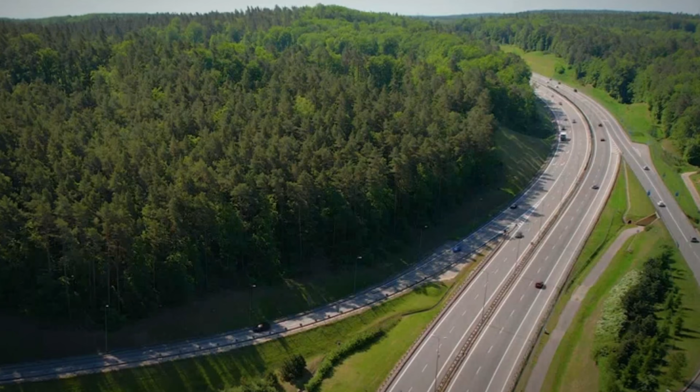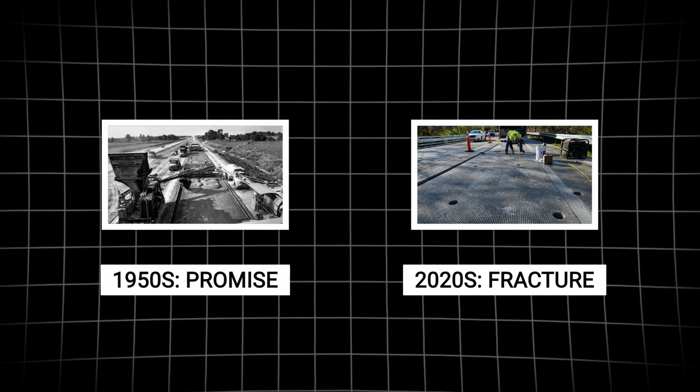You have driven it 1,000 times without a single thought—the overpass that has always been there, the gray ribbon that was old when your parents were young, and will be there, you assume, long after you're gone. Concrete feels like the closest thing we build to forever.

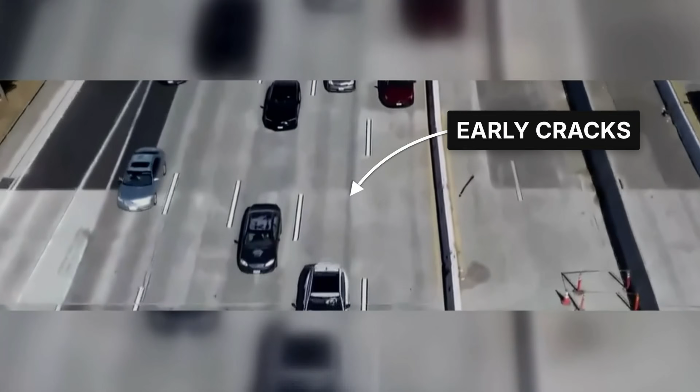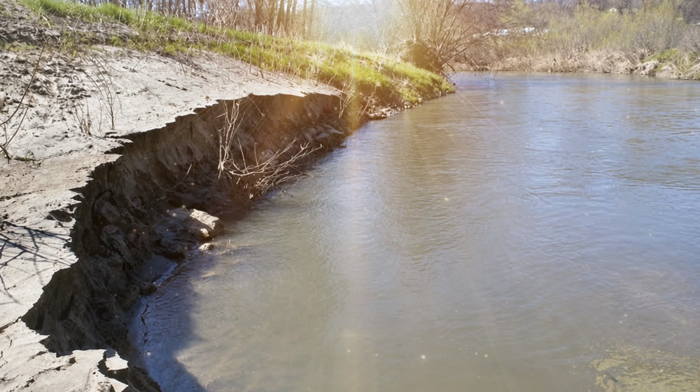That is the trick, because the road under your tires was never meant to last, and the new one already knows it. Here is the strange thing about a road: it is the one piece of the modern world we treat as permanent scenery. We name our exits, memorize our merges, and file the whole surface away under things that do not change. A mountain erodes, a river moves, but the highway, we decide, simply is.

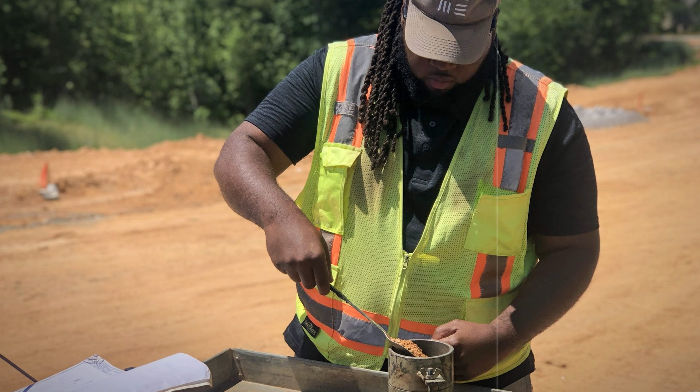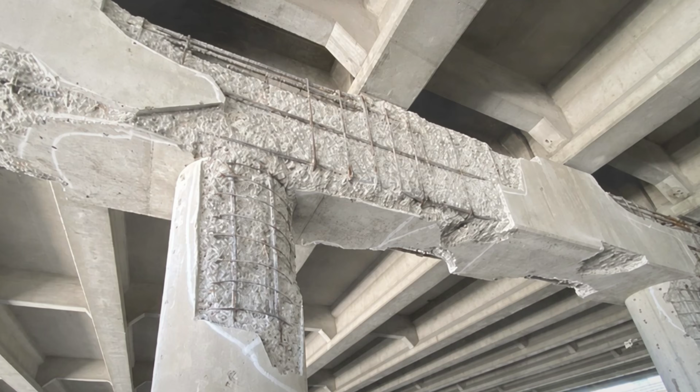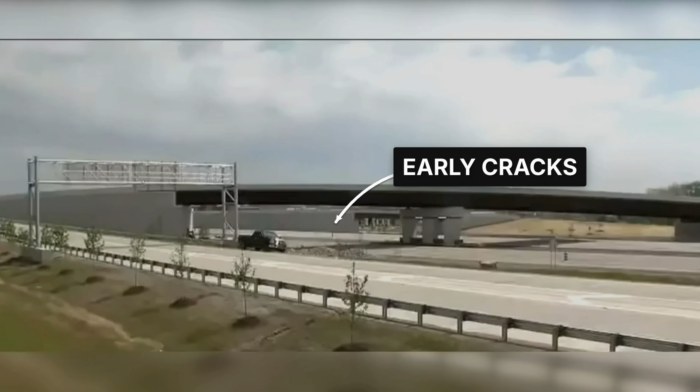It was poured before we got here, and it will be poured over long after we leave. That belief is exactly what this story is about—not the road you can see, but the promise buried under it. Because America was sold a highway meant to outlast everyone who would ever drive on it, and the country agreed, quietly, to stop asking how long that would actually be. The answer is not comforting, and the newest, most advanced version of that promise, the one engineers now brag can hold up for a century, is already breaking in places where the concrete has not even finished curing.

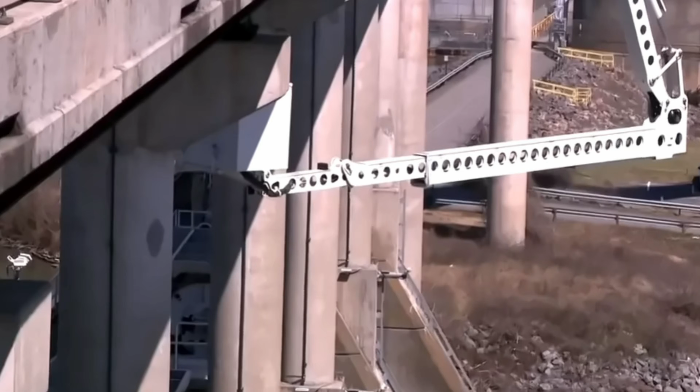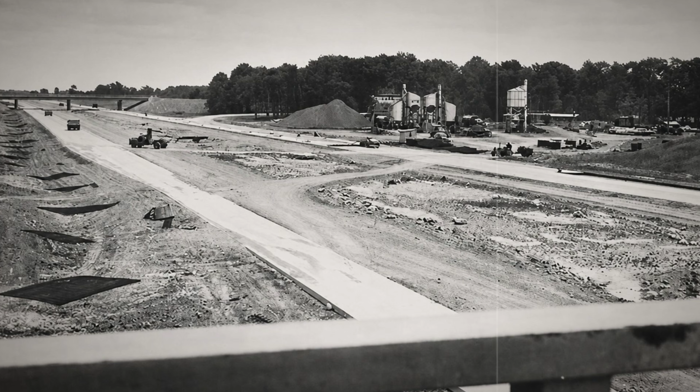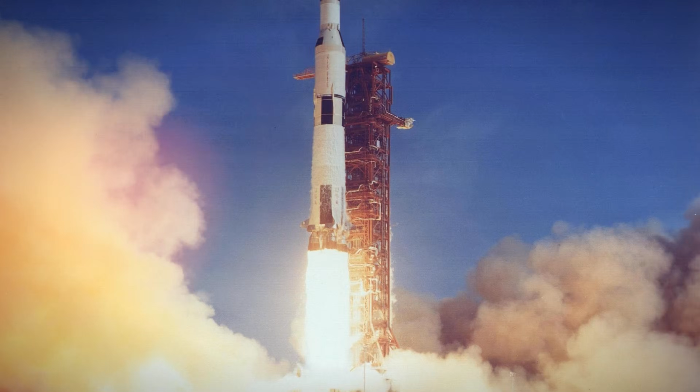Let's get into it. Start with the promise, because it was enormous. On June 29, 1956, President Dwight Eisenhower signed the Federal Aid Highway Act, and with one signature launched what would become roughly 47,000 miles of interstate, a network that eventually cost on the order of $130 billion and rewired the entire country. It was pitched the way we pitch moonshots, the largest public works project in human history, a concrete tapestry stitching every American place to every other. A man could now drive coast to coast without a single traffic light.

It felt like building something that would stand for 1,000 years. But permanence was never in the fine print. It was never in the fine print at all. When engineers actually designed those roads, they built them to a 20-year design life. 20 years. The gleaming symbol of American permanence was, on paper, a 2-decade product.

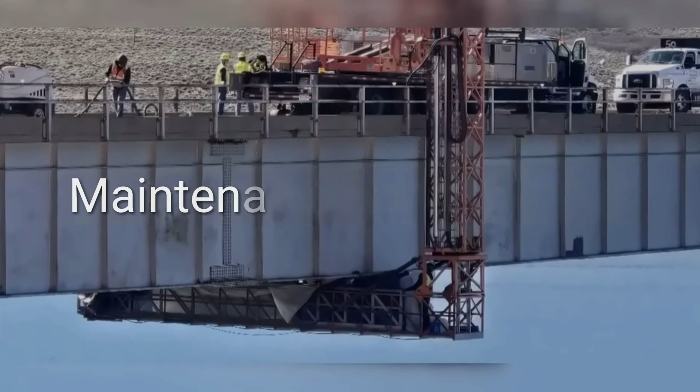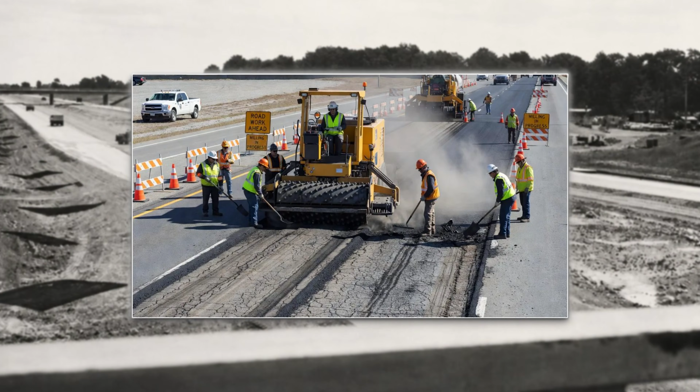And the reason it didn't collapse on schedule is the first quiet truth of this whole story: nobody intended for it to be temporary out loud. They simply assumed the future would keep paying to rebuild it. The 1956 law that funded the greatest road system on Earth included almost nothing for maintaining it. As one highway historian put it, Congress behaved like a family that builds a beautiful new house and never sets aside a dime for the day the roof goes bad.

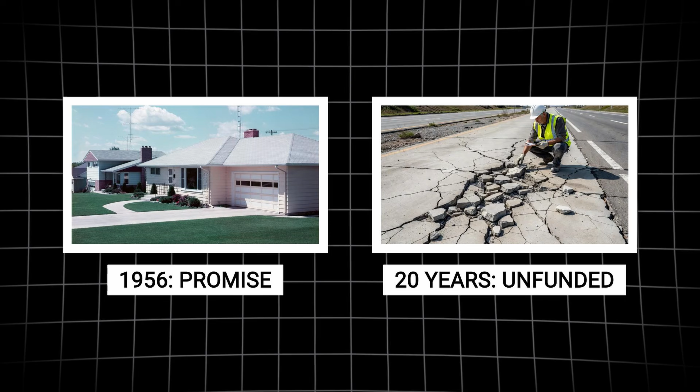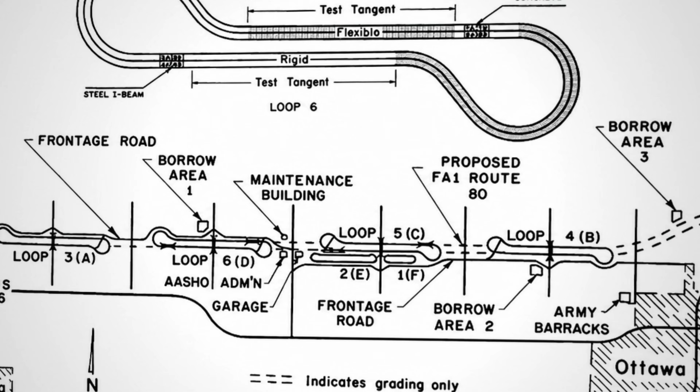The roof went bad faster than anyone guessed. The interstates were carrying more cars and far heavier trucks than the planners had ever modeled. Segments that were supposed to absorb 20 years of wear absorbed it in a fraction of that time. And here is the part almost no driver knows, the reason a single truck matters so much more than your car does. Back in the late 1950s, near Ottawa, Illinois, the highwaymen ran an experiment that would define road building for the next half-century.

They drove army trucks in endless loops over test pavement, millions of miles of it, around the clock, just to watch roads die. What they found became known as the fourth power law, and it is brutal. Double the weight on an axle and you don't do twice the damage, you do 16 times the damage. Follow that curve out and a single loaded 18-wheeler grinds a road the way thousands of cars would.

By one federal estimate, close to 10,000 of them. Every commute, you share the pavement with vehicles that are, structurally speaking, erasing the road beneath you. You are driving on the light end of a machine built for the heavy end.

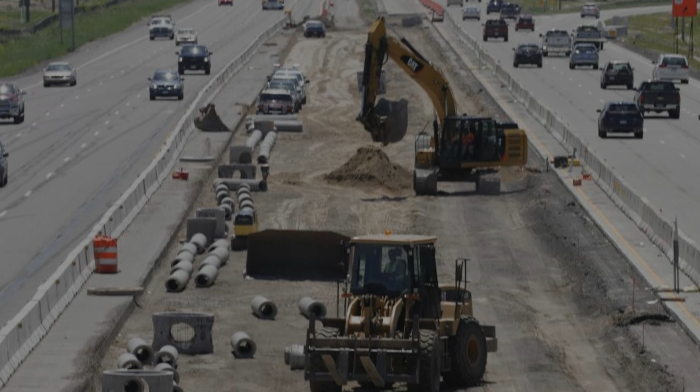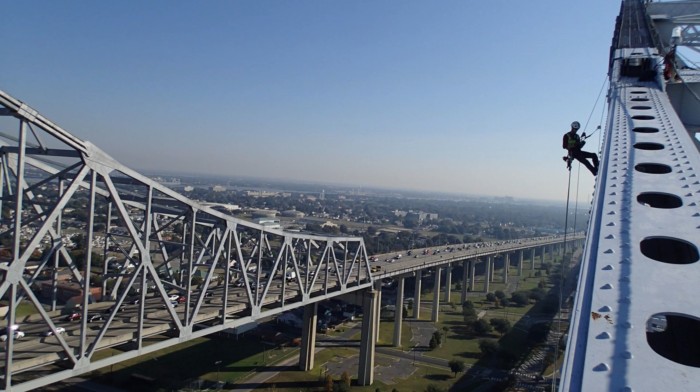So the interstate aged, and America did what it always does with the thing it refuses to see. It patched, it resurfaced, it stretched a 20-year road toward 50, 60, 70 years, and called that success. Today, more than a third of the interstate system is over 50 years old. A third of its bridges need repair or replacement. And the country's civil engineers, the people who actually know, grade America's roads a D+. That is the good news, by the way—it is an improvement over the D they gave a few years back.

Which brings us to the fix, because the modern answer to a crumbling 20-year road is a beautiful phrase the pavement industry now sells with real conviction.

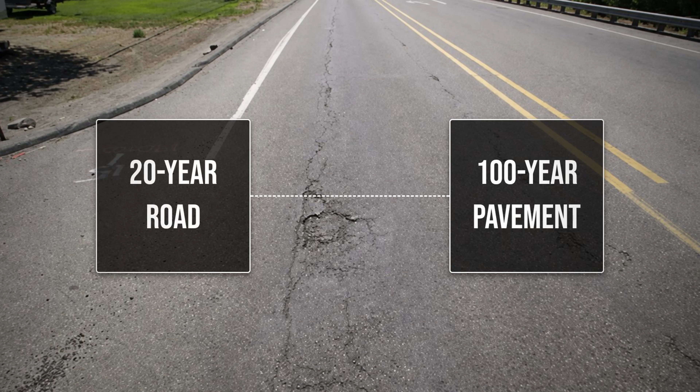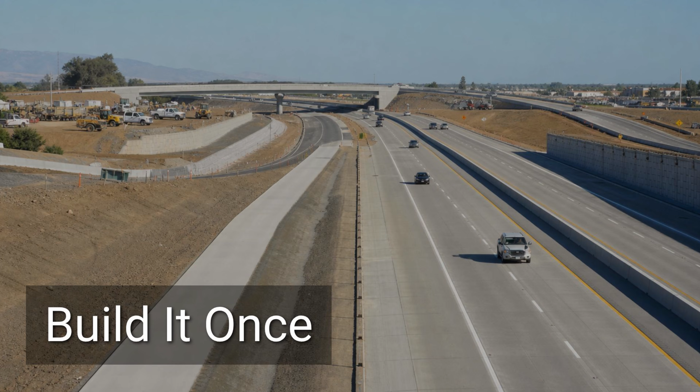100-year pavement, thicker beds, better drainage, engineered layers, the whole science of longevity. Roads designed not to last a generation, but to last a century, to finally break the cycle of tearing everything up every couple of decades. It is the promise in the title. Build it once, build it to outlive us all.

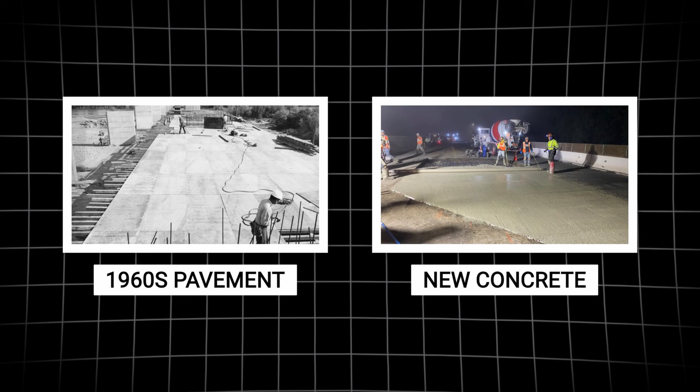And then you look at what actually happens when they pour it. Go to downtown Sacramento, to a stretch of Highway 50 that the state spent about $511 million to rebuild, a project explicitly meant to replace tired 1960s pavement and carry the city for decades to come. New concrete went down in the summer of 2023. Within roughly a year, inspectors found it cracking, chunks breaking loose.

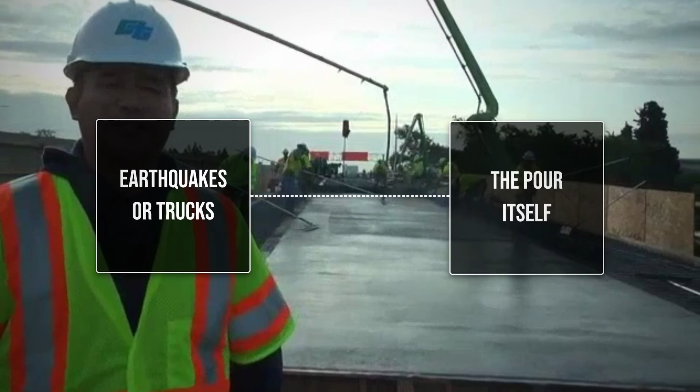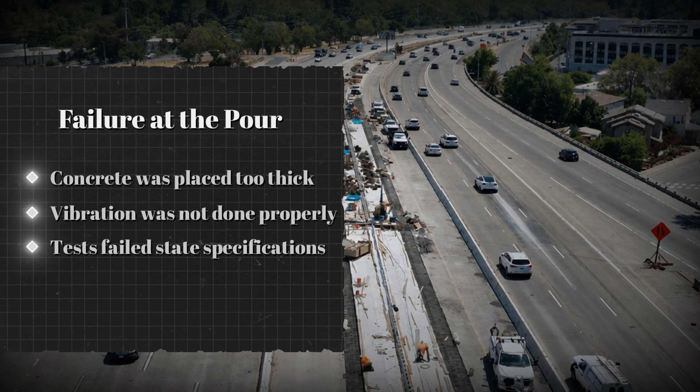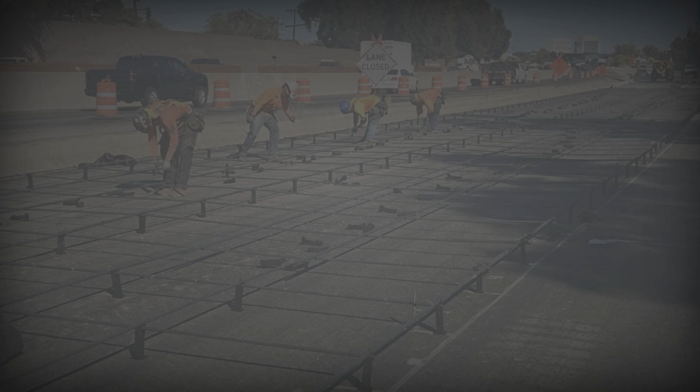Not from earthquakes, not from decades of trucks, from the pour itself. The concrete had been laid too thick and hadn't been properly vibrated as it set, and testing showed it simply didn't meet the state's own specifications. A 280-foot section, about the length of 3 basketball courts laid end to end, had to be torn out and poured again. The brand new road, the one built to last, failed before it was old enough to have a pothole. The contractor ate the cost, and officials were quick to call it rare.

But that is precisely the point. The promise is a century. The reality can be months. And even when they get the pour right, the world is working against it every single day.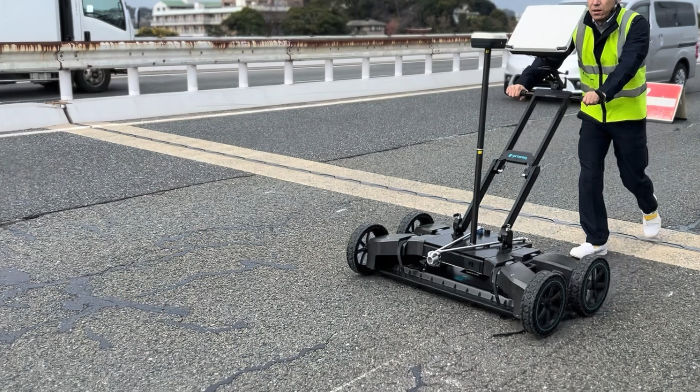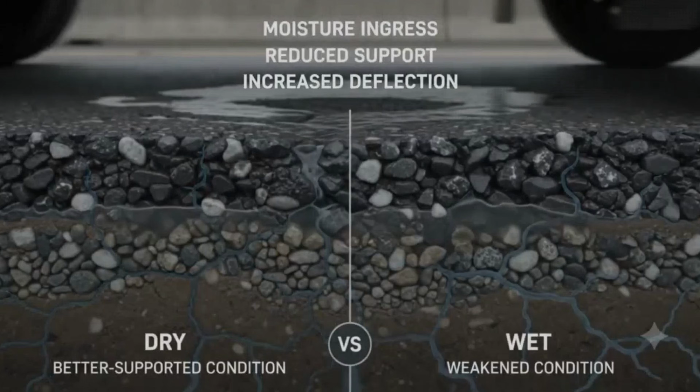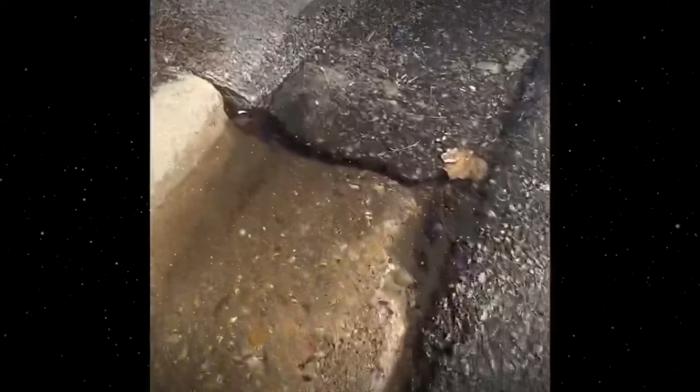This is the second quiet truth. A road is not a solid thing sitting on the ground. It is a thin skin stretched over dirt, and everything wants underneath it. Water finds the smallest crack and seeps below the surface. In winter it freezes, expands, and pries the layers apart. Then a heavy truck rolls over that hidden pocket of water and slams it downward like a hammer, blowing out the base from below. Do that 10,000 times a day and you get the pothole that swallowed your alignment last spring.

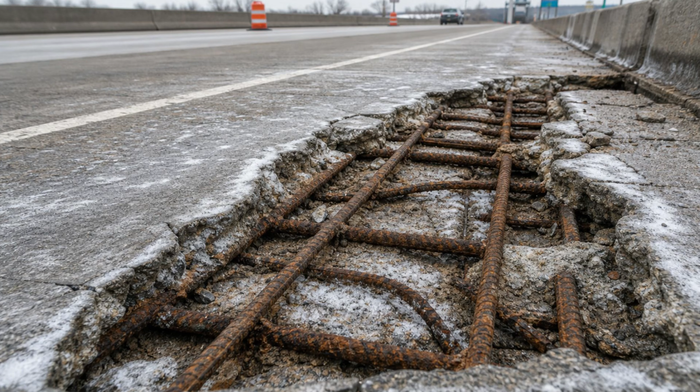Add the salt we pour on roads to melt ice, which quietly eats concrete and corrodes the steel inside it. Add the coastal air. The road is losing a slow war with physics that begins the moment it's finished.

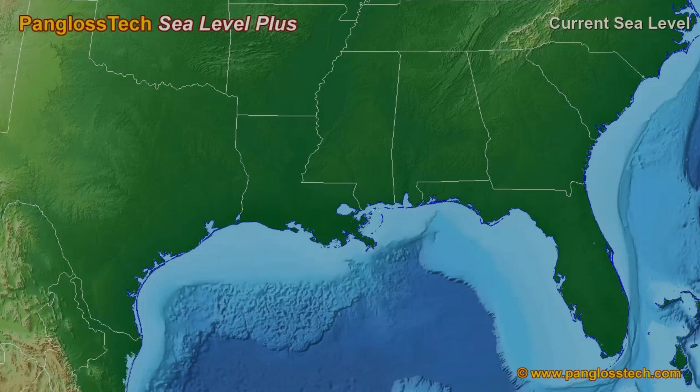Now widen the lens, because the ground itself is changing under the whole system. More than 60,000 miles of America's coastal roads already sit in the path of rising water. Along the Gulf Coast alone, federal researchers estimate that some 2,400 miles of major roadway could be permanently underwater within the next 50 to 100 years. That is the cruel irony folded into a 100-year promise. You can engineer pavement to last a century, and the coastline it runs along may not be there to hold it.

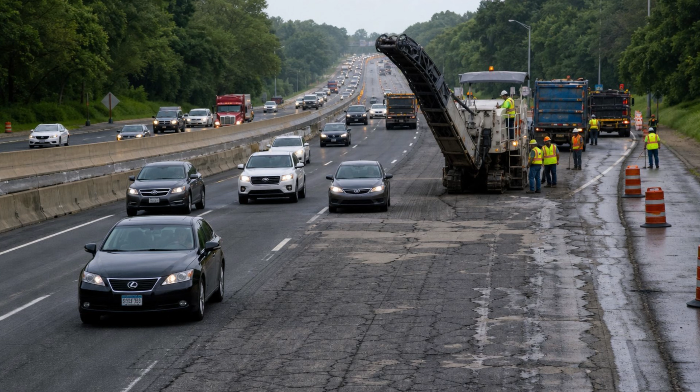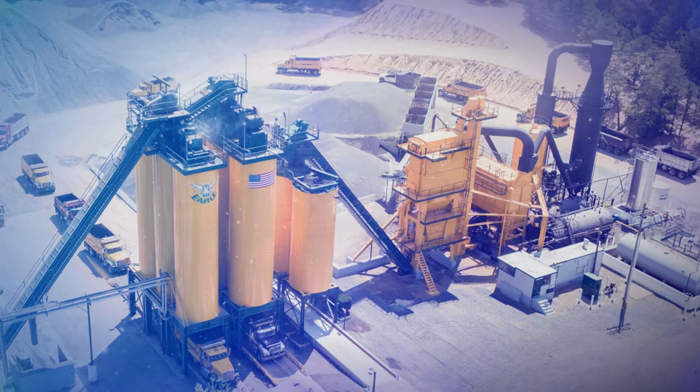So why don't we just fix all of it? Here is the money truth, and it is almost funny if you don't think about it too hard. The main way America pays to build and repair its roads is the federal gas tax, 18.4 cents a gallon. That number was set in 1993 and has not moved since. Not for inflation, not for anything. A generation of rising costs and more efficient engines has quietly gutted it.

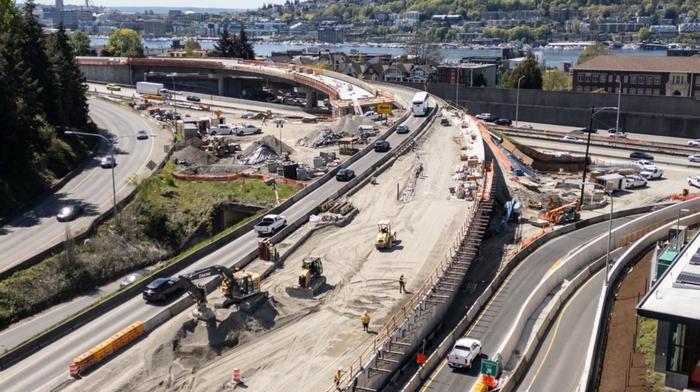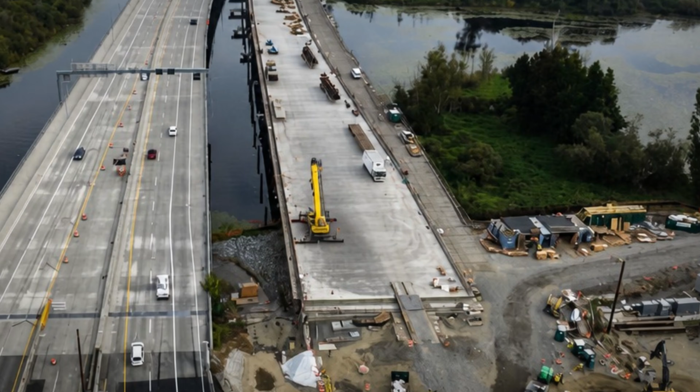The engineers estimate the tax has lost around 80% of its buying power since the year it was frozen. Every time you fill up, you are paying for the roads with 1993 dollars. Meanwhile, potholes alone cost American drivers something like $26 billion a year in blown tires and bent rims, and closing the roadway funding gap over the next decade runs into the hundreds of billions. We are trying to maintain a 21st century country on a paycheck we stopped adjusting when Jurassic Park was in theaters. And still, this is the thing.

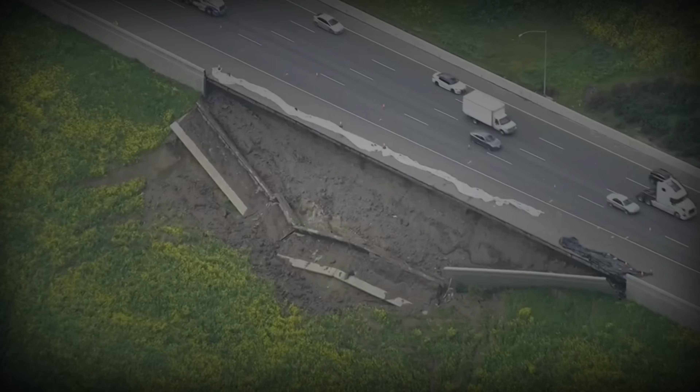We drive over all of it without a flicker of concern. That is what this story is really about. Not the crack in the concrete, the agreement not to look at it. We have decided the road is permanent because looking closely would change how the drive feels, the same way the whole country decided the interstate would last forever. Because the alternative was admitting we built the greatest road system on Earth and never funded its old age.

The overpass you pass under twice a day was poured to a 20-year plan and is running on year 60. The new stretch they just cut the ribbon on may already be cracking under the paint. And somewhere out ahead of you, on a coast you'll drive to this summer, there's a highway built to last 100 years, running along a shoreline that has maybe 50 left. The concrete tells you none of this.

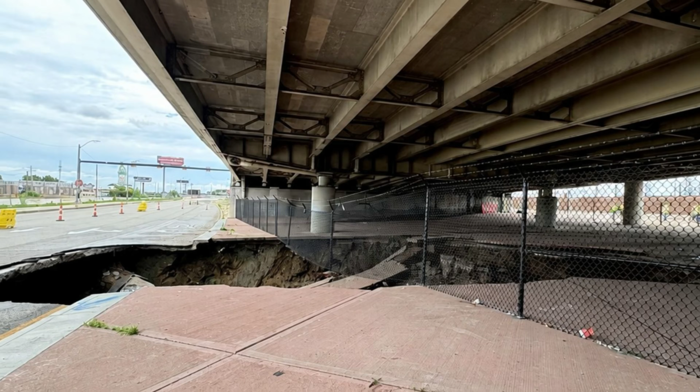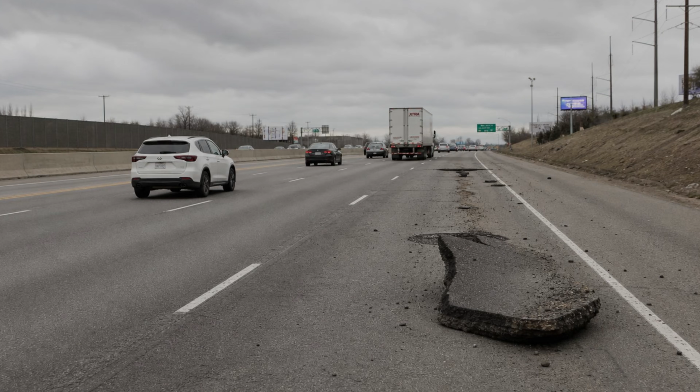That's the whole point of concrete. It looks like forever, right up until the morning a piece of it is lying in your lane. And even then, most of us just steer around it and keep driving and go on believing the road was always there and always will be. The way we've believed it since long before anyone stopped to ask what built to last was ever really promising.